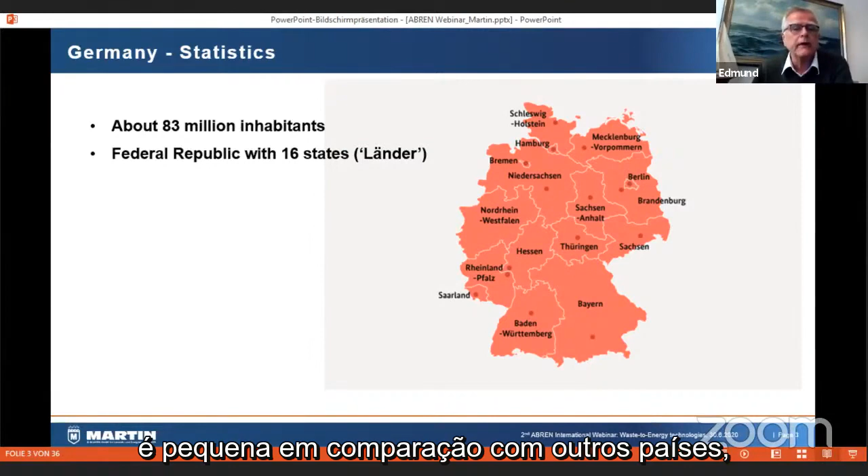Germany has about 83 million inhabitants. It's a little bit over 350,000 square kilometers, so quite small compared to many other countries, especially to Brazil. We are a federal republic, 16 states, where some of these states are cities like Hamburg, Bremen, and our capital city, Berlin.

So when it comes to waste arisings in Germany in 2018, which are the last figures available, the total waste is about 420 million tons, of which a majority was recovered, and quite a bit of that was recovered thermally, which means in some kind of incineration plant.

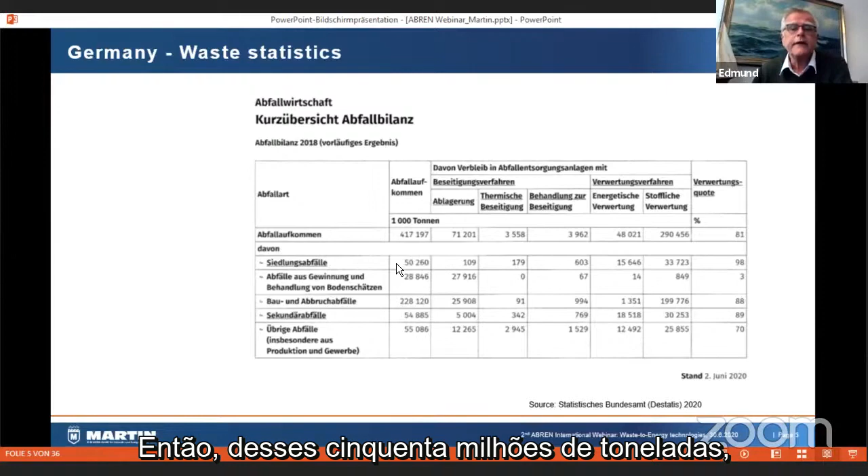When you look at the details for 2018, of these 420 million tons, what is of interest to our discussion today is basically what is called Siedlungsabfälle, which is municipal waste or similar waste, about 50 million tons total. The majority, like in many countries, is obviously construction and demolition waste, which is more than half. So of these 50 million tons, 33 million tons were material recovered and about 15 million energy recovered, which is basically waste to energy, which we will talk about.

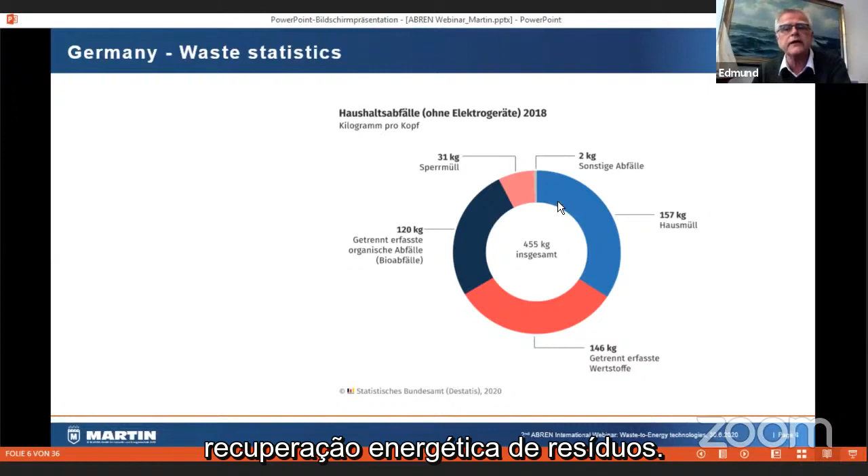Per capita, you see what every German generated in terms of waste in 2018, 455 kilograms, which does not include electronic waste. And you can see here the different big fractions. This is biological waste, about 120 kilograms. This is material for recovery. This, almost 160, is MSW. The majority of that is obviously going to waste to energy. And there's a little bit of bulky waste and some other waste streams. So per capita, we have about 450 kilograms per capita per year in Germany in 2018. Quite a bit of waste that we are still generating.

Regulations. This is not true for Germany alone, but for all of the EU member states. All regulations come from Brussels. That's a very straight and very clear rule. Regulations are drafted in Brussels, they are passed eventually, and then they have to be put into national law in every EU member state. Typically, there's a 4 or 5 year time frame for each of these regulations to be put into national law. The only drawback is that there are no really good sanctions if countries don't do that.

Some member states are a little bit more active doing that, some are not, so there's not a lot of good sanctions. Germany is playing a very active role in Brussels in the legislation, especially in waste management, and many of the rules or the data taken, the limits, etc., are taken from German experience.

I've been very active in Brussels myself as president of ESWET, the European Association of Waste to Energy Technology Suppliers. There you see a lot of German people from the government that are very active in supporting new regulations.

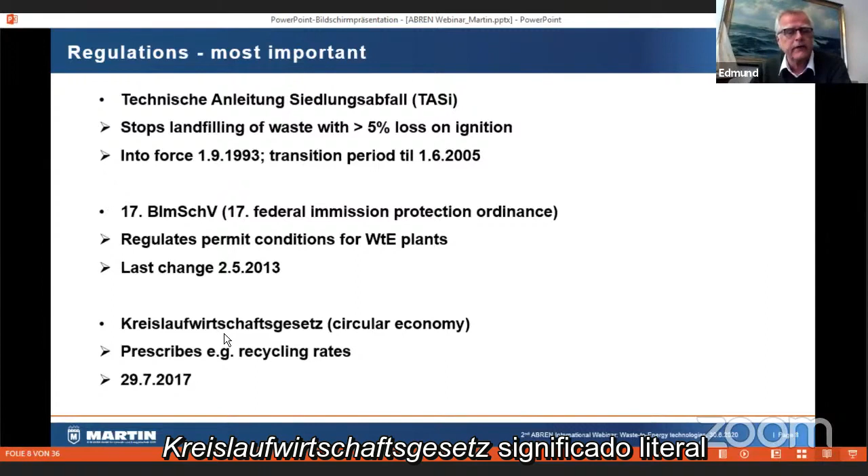This is one really very much to remember. What is important, and I think this is not only in Europe but worldwide now, is circular economy. In Germany, we call it Kreislaufwirtschaft, which literally means circular economy, which clearly says we have to go away from the habit we had for many decades of using products only once, but try to keep them in the economy as long as simply possible and feasible.

This law describes a lot of things, but among others, recycling rates for packaging waste, for municipal solid waste, etc. This came into force in 2017. Again, it's basically a law coming down from the Circular Economy Directive passed by the EU some years ago, and then being trickled down into German law.

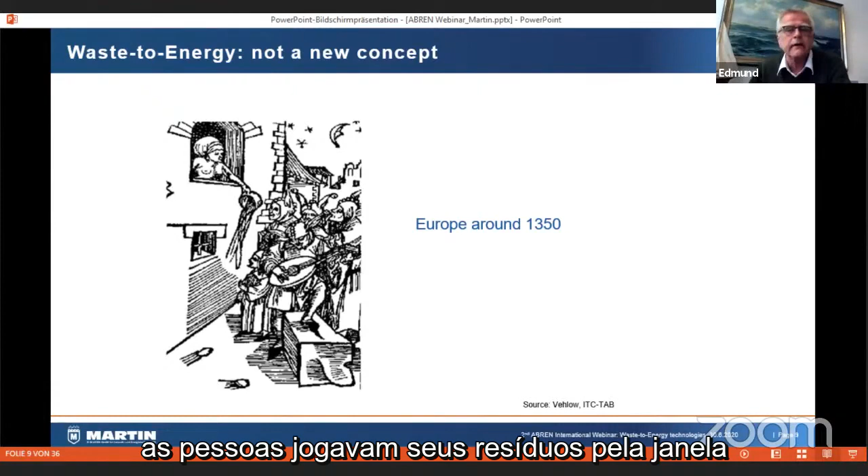Waste to energy is not very new. In the Middle Ages, in Europe at least, people threw their waste out of the window. So you had very dirty streets, hygiene was very bad, and this caused a lot of headache and a lot of diseases.

The first waste incineration plants, I wouldn't always call them waste to energy, but incineration plants, were built in the late 19th century, around the 1870s in England, and in Hamburg, Germany, at the end of the 19th century. These were very simple plants, but already they had some electricity generation, some district heating use, and they even used the bottom ash to bake bricks. So a lot of the concepts we have today were already put into force then: making use of the energy in the residual waste that can no longer be recycled, and also using the materials left after incineration. It's a concept very important today, but nothing our generation has invented; it was already in place in the late 19th century.

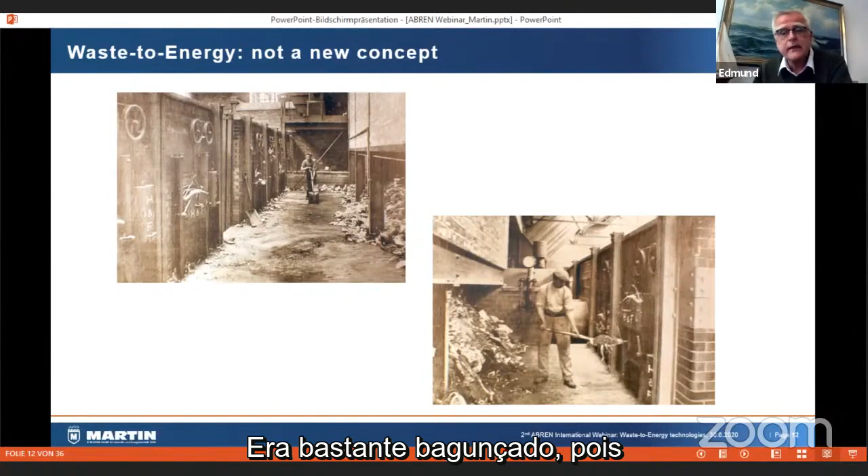There are some pictures of plants from around the turn of the 19th to 20th century, which were quite messy because they were sometimes batch type. People had to feed the waste by hand and take out the residues afterwards by hand. Later on you had a carriage where you took out the bottom ash. It was all very simple, but it was a concept that was working. There were a few plants in England, Germany, and Denmark, but it didn't really last.

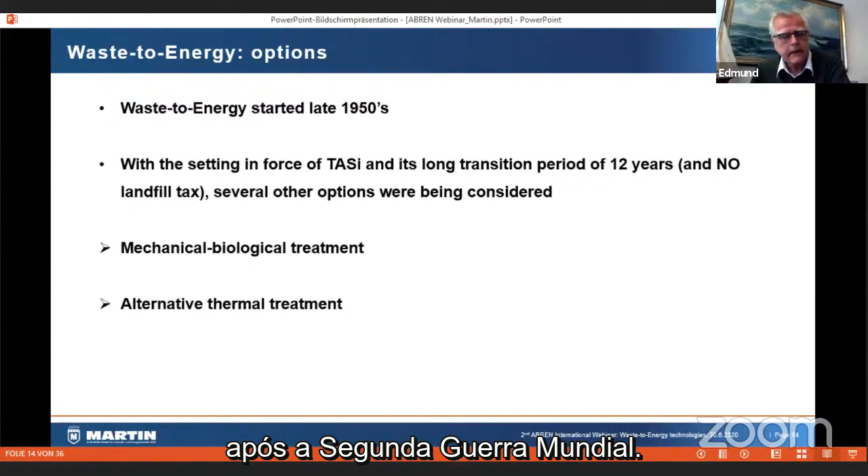Waste to energy really only started in Germany, but also across Europe, after the Second World War, where the economy was good enough that there was enough money available. Landfill was considered not the best option, so there was also a drive to make use of waste and materials as much as possible. This is where it basically started in Europe and in Germany, in the late 1950s.

As I said before, with the setting in force of the technical ordinance for waste in 1993, there was a very long transition period of 12 years with no landfill tax, so nothing happened in between. There were many other options being considered because, as is still the case today, waste incineration was not looked at favorably by many people. So mechanical biological treatment plants were developed in Germany especially, and there was a lot of discussion on alternative thermal treatment processes, which I will talk about.

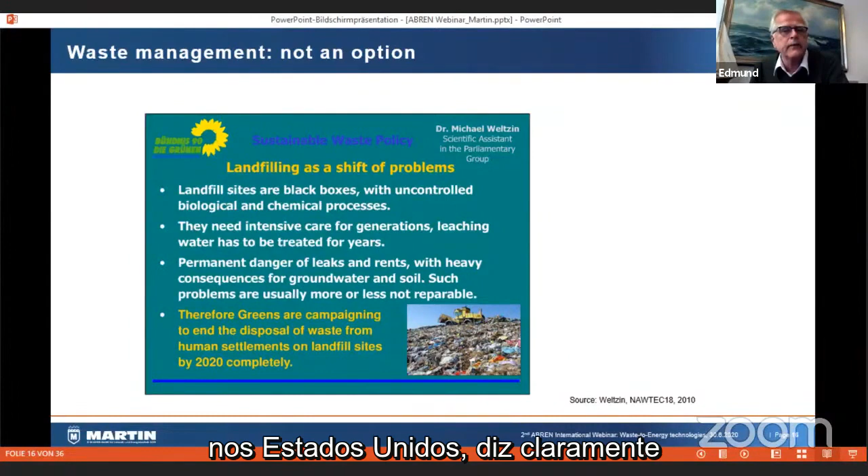Even the green people that don't like incineration, in 2010 published a report in NAWTEC in the United States where they clearly call for an end of disposal of waste from human activity on landfill sites. This is what they said for 2020. I think we more or less got there in Germany, that waste which still contains biologically active material is no longer being dumped on landfills.

So, mechanical biological treatment. As I said before, landfilling of biodegradables stopped in mid-2005. At this time we had a green social democrat government, and they don't like waste incineration, so there were developments of mechanical biological pretreatment plants. Some plants worked, some plants failed. There are still quite a few in operation today.

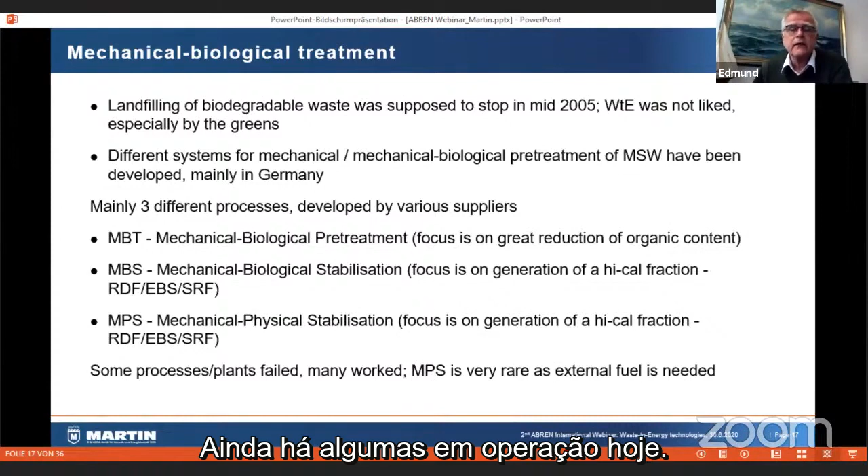The mass balance is basically: you can recover some metals, which is good. You have some loss from evaporation because you need heat to drive off the water. There is still, and this was a change allowed by the law, the option to landfill the low calorific fraction. And then there was something considered in the early days to be valuable - a high calorific fraction - because driving off the water increases the heating value. This was supposed to go to coal-fired power plants and cement kilns.

In the early days, when these plants were developed and business plans were made, it was even thought they would get a positive fee, getting paid for the high calorific fraction. We have about 50 plants in operation, with 6 to 7 million tons of MSW going in there, and the remainder is about 50%, as I said before, remaining after this treatment. What you have to remember, though, is that the total heat energy content is almost unchanged - there's some rotting, some carbon chemical reaction, so you generate heat and drive off water, but the energy content stays more or less the same.

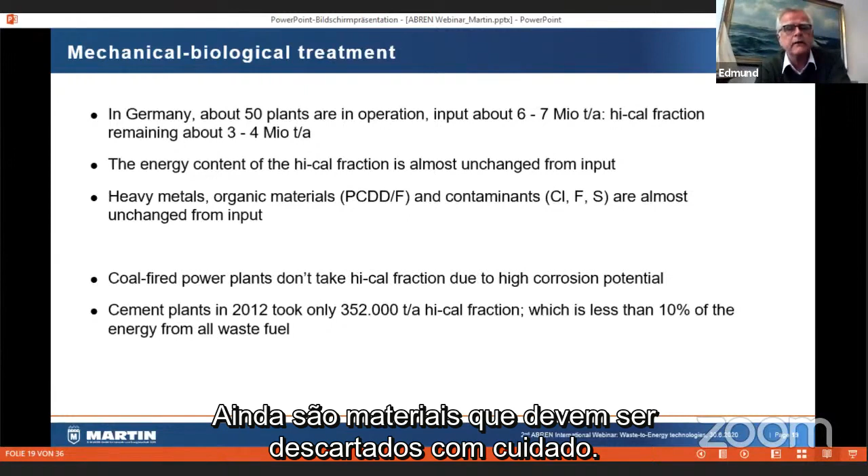Especially the material that makes non-recyclable waste difficult - organic materials, contaminants like chlorine, fluoride - are still in there, so they still have to be handled very carefully. In the end, coal-fired power plants did not like this because they were very afraid of corrosion in their boilers, and cement plants only take a very small fraction. These figures are from 2012, but they have not changed dramatically over the years.

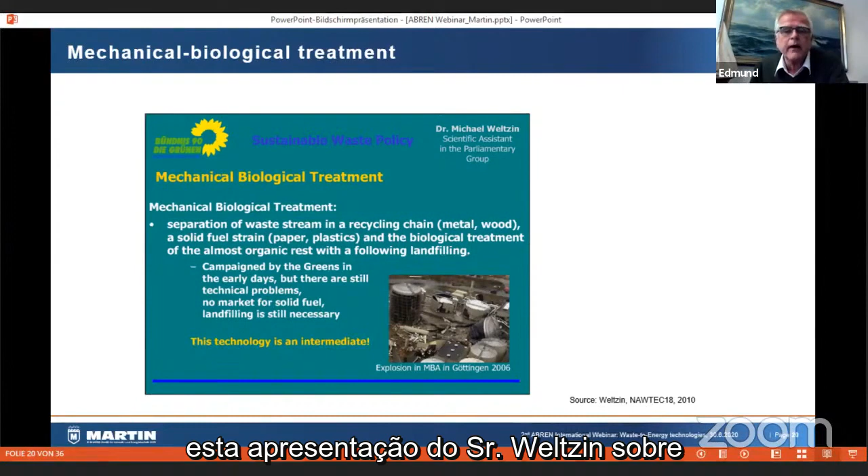They are not called waste-to-energy plants, they are called RDF or solid recovered fuel plants, but in essence they are the same technology and the same type of material as waste-to-energy plants. And again, I like to cite this presentation by Mr. Weltzin about mechanical biological treatment.

I only want to draw attention to the conclusion at the bottom: this technology is an intermediate. And what we've seen in Germany in reality is that because of the economy, they cannot sell the high calorific fraction, but have to basically pay a fee for that. A lot of the plants have been shut down, or once they reach the end of life, they will not be replaced, they will just be torn down.

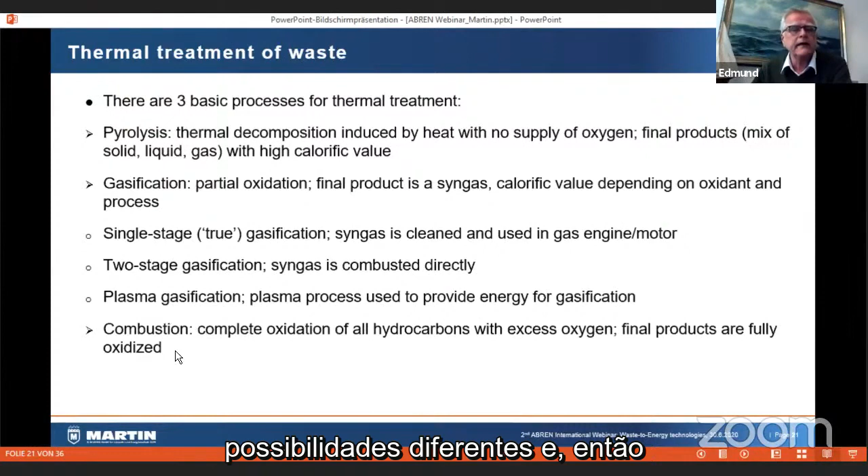Thermal treatment of waste has 3 basic processes. It starts with pyrolysis, goes to gasification - there are different possibilities - and then combustion. It starts with pyrolysis, where there's no air injected, so no oxidation happens. In gasification, there's incomplete oxidation, creating a combustible gas you might use in a different process. Then there's straight incineration or combustion, where you completely oxidize all the burnable material.

There was a lot of discussion and hope for so-called alternative thermal treatment plants - as I said, pyrolysis. This is based on a study these figures from ISWA did some years ago. I was part of this working group where we looked at these different technologies. There's about 25 plants worldwide based on pyrolysis of mixed municipal solid waste, non-recyclable waste. The capacity is very small, about 1 million tons, mostly in Japan.

Gasification - again, it's single stage, meaning there are plants having a gasification stage integrated with a combustion stage, which doesn't really have a big advantage compared to incineration. There are around 50 plants, again small capacity. 2-stage gasification creates a syngas, a combustible gas which can be used for something else. There are even fewer plants with very small capacity. And plasma gasification, just one means to gasify the material - there are even fewer plants.

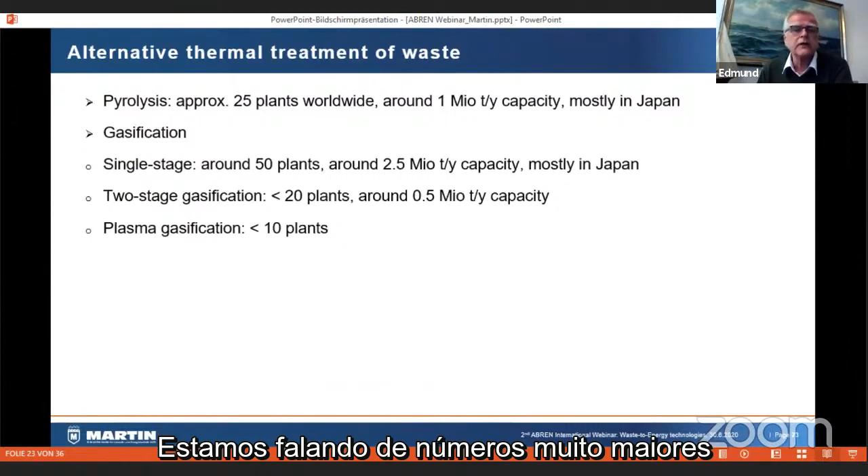When you compare this to MSW, there are more than 2,000 plants in the world with more than 100 million tons per year capacity. So we're talking about much larger numbers, much larger experience and proven track record. Mr. Weltzin says these technologies have not shown reliability so far - this was in 2010, and I don't think this has changed at all up till now. There have even been more plants losing money, people trying to get this working, but it doesn't work for mixed municipal solid waste.

Now, a short intermediate about Martin company. We are a small company based in Germany. This is our head office where I'm sitting right now, in Munich. We are almost 100 years old, family owned - first generation the founder, second generation, third, and the current fourth generation. 100% family owned, we are definitely one of the main companies in the waste energy sector since 1925.

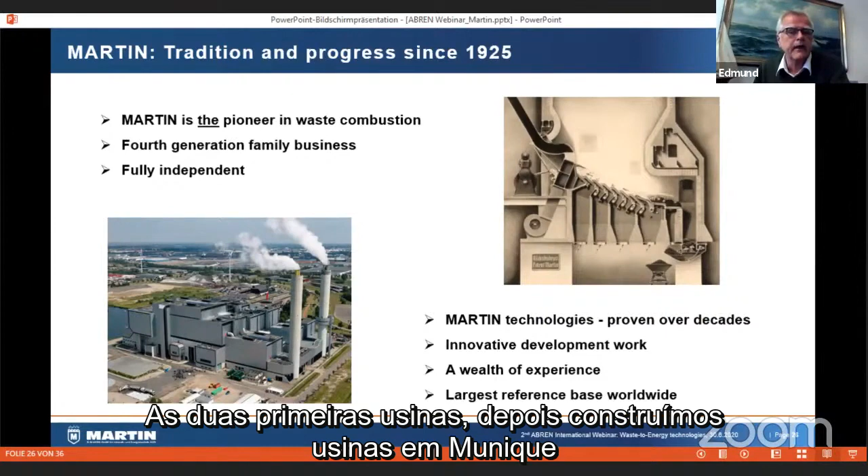This is a picture from the patent application in 1925. And this is one of the largest plants in the world, in Amsterdam, with 6 lines. So we have a lot of experience and a large reference base, and it might be interesting to know that the first 2 plants on our reference list were built in Sao Paulo. They are no longer in operation today, but this was in the late 50s, the first 2 plants. Then we built plants in Munich and more in Europe.

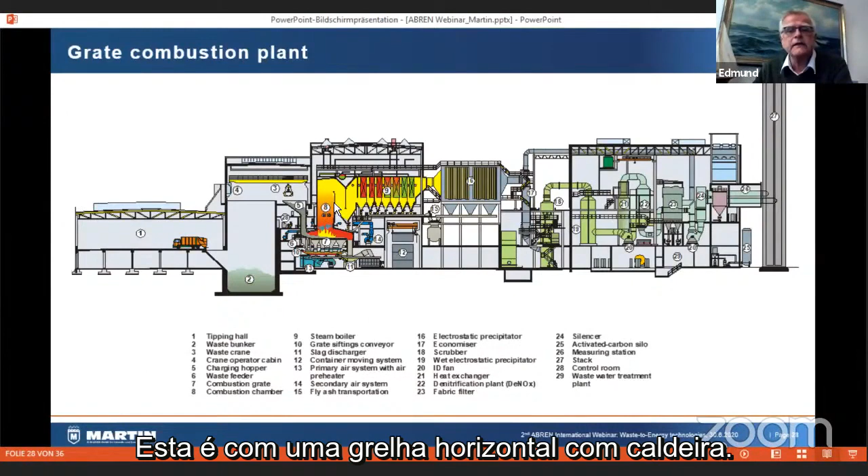A total plant can then look like this. This is a horizontal grate in this case, with a boiler, and then the very elaborate flue gas treatment to meet emission limits that are very stringent and tight, not only in Europe but in most countries where these plants are being built. They want European standard emission limits, which are quite low compared to many other industries.

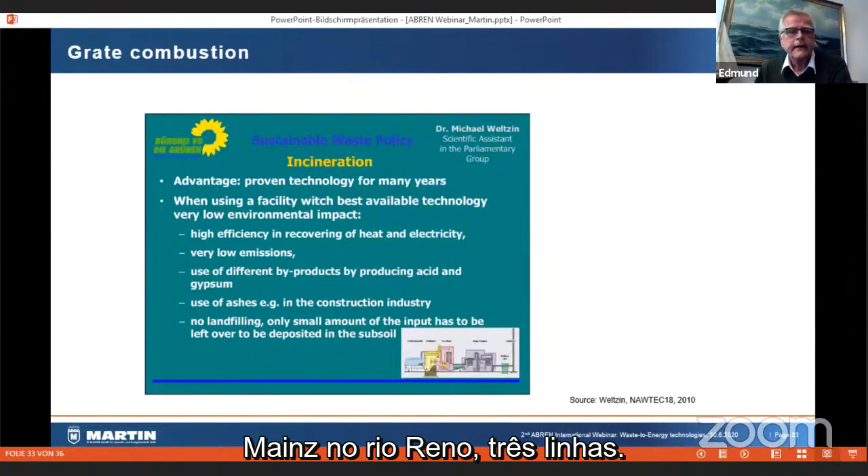And again, Mr. Weltzin citing that it is a proven technology for many years. I mean, this was something amazing for a green person to say, and he's a scientific assistant in the parliamentary group in the Bundestag, in the federal parliament, to say when using best available technology, there's very low environmental impact. So I think it's something that speaks almost for itself.

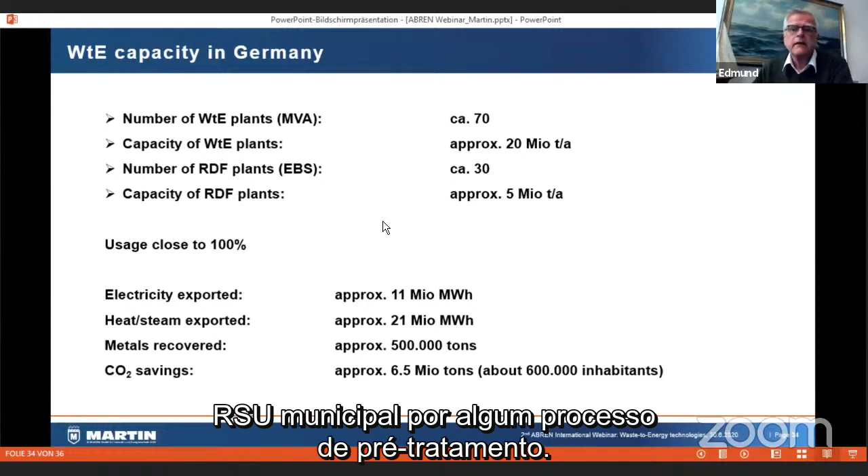What is the waste capacity in Germany that we have right now? We have about 70 plants that are straight waste to energy plants, capacity about 20 million tons. And then we have about 30 plants built basically to take high calorific fraction. It's called Ersatzbrennstoff, RDF, solid recovered fuel, some high calorific material developed from MSW by some pre-treatment process. The capacity of that is about 5 million tons per year. And in the last years, the usage was basically 100%.

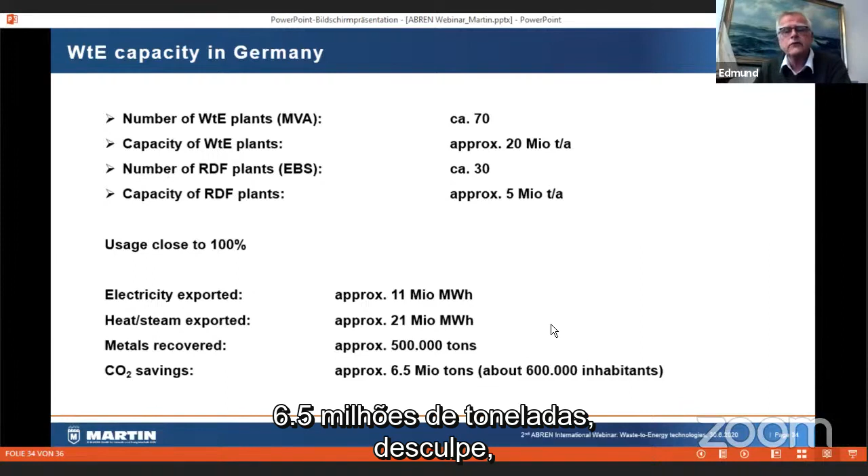At the moment, we are burning in Germany year after year about 25 million tons of non-recyclable municipal solid waste or waste from commercial industry. We export a lot of energy. We recover close to 500,000 tons of metals, ferrous and non-ferrous, and there's quite a substantial amount of savings of CO2. The 6.5 million tons is about the CO2 emitted by 600,000 people.

It's clear we cannot solve the energy problem in any country. There are projections that if you have a good energy recovery rate, you can maybe have 3 or 4% of the electricity need covered, no more than that, but we can make a very valuable contribution and especially avoid landfilling. So what are the conclusions?

Waste to energy plants are definitely an integral part of German waste management. There is a lot of opposition, that has not changed at all. Working close with the public is obviously very essential, to inform them as early and as openly as possible. The market in Germany is mainly replacement. There's almost no greenfield projects. There's also no capacity increase, but mainly to replace lines that have now become 30, 40 years old, which is a typical lifetime of a waste to energy plant.

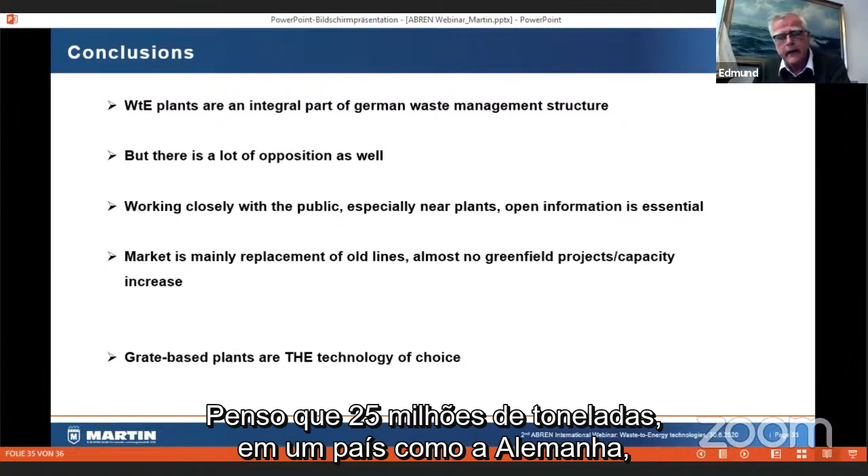And for the technology, grate-based plants are the technology of choice because they are proven, they're reliable, and they are there to make use of the energy and the materials in waste that cannot be recycled in a sensible way. And I think 25 million tons in a country like Germany speaks for itself. There are very clear statistics that say we only take away from landfill, we don't take away from recycling. We want to really use the waste that is not recyclable anymore, that is at the end of its lifetime, and avoid landfill. And with that, I thank you very much for your attention.

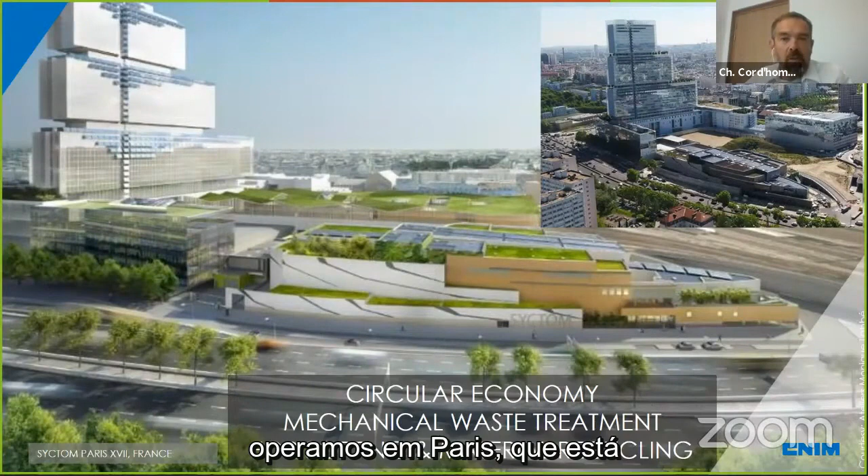And for waste, we are also building mechanical and biological waste recovery with sorting and composting, or sorting and material recycling, just as this brand new plant that we have built and that we are operating in Paris, in which we are sorting almost completely automatically material from the selective collection from Paris. It's 45,000 tons per year of waste. In total, all the plants that we have built are recovering the material and energy from municipal solid waste of 110 million people around the world.

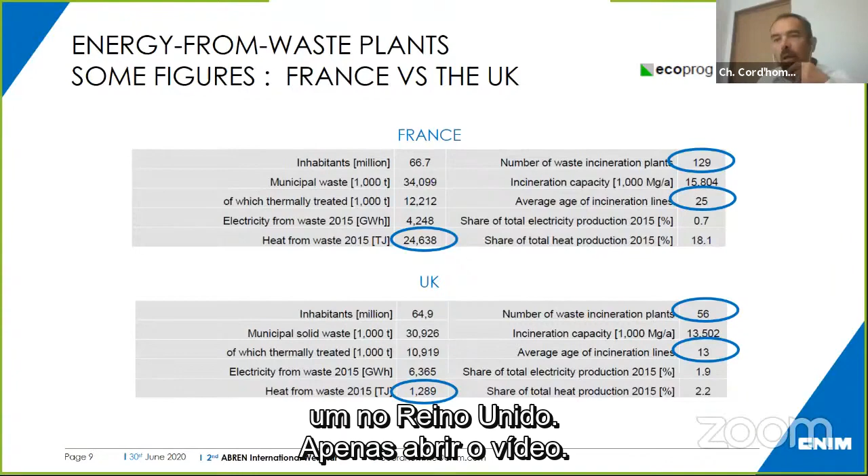So just a moment. It seems... Excuse me, a video just started. Okay. So it's better.

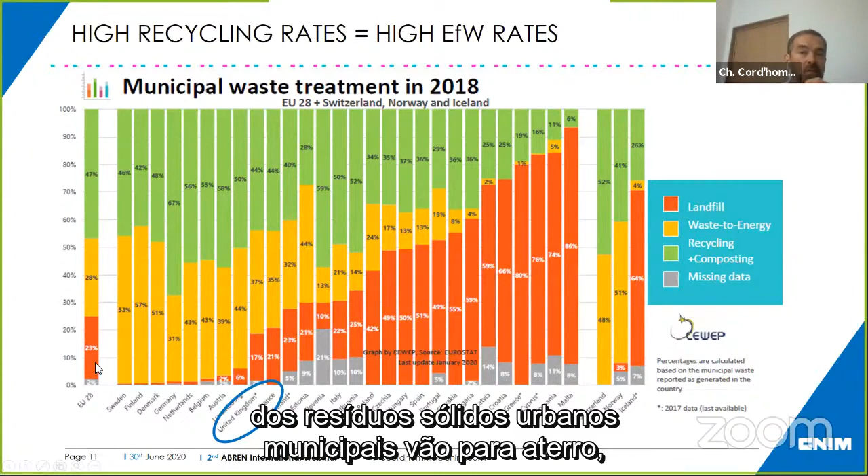This graph is very interesting from CEWEP, once again coming from official statistics from Europe, Eurostat, comparing the shares between landfilling in red by country, then in orange waste to energy, and in green recycling and composting. You can see on average in Europe that we have 23% of municipal waste going to landfill, 28 going to waste to energy plants, and 47 for recycling and composting. This is the average for the European Union.

In the United Kingdom and France, this is quite similar. There is 17 to 19% going to landfill compared to 21 in France, and 35% going to waste to energy in both countries. But in Germany, as Edmund has shown us, 31 is going to, almost nothing is going to landfill, as is the case in Sweden, in Denmark, or in Belgium. On the contrary, on the other side, you could see Eastern Europe countries, like Greece, for example, where 80% of the waste is still going to landfill.

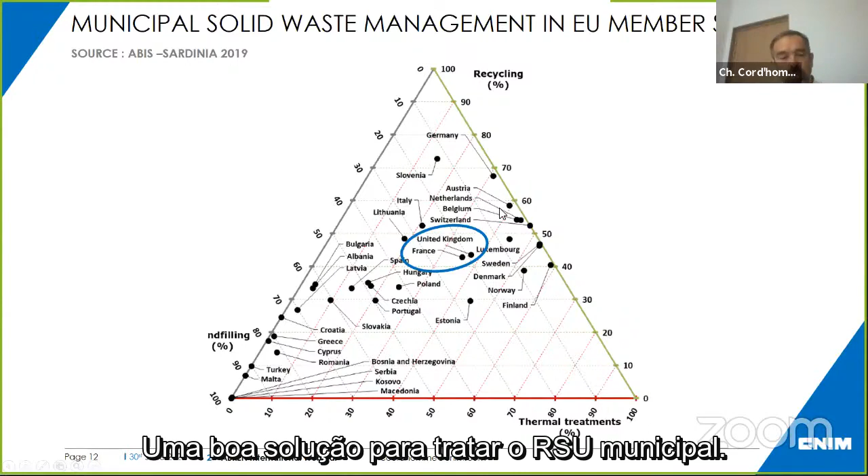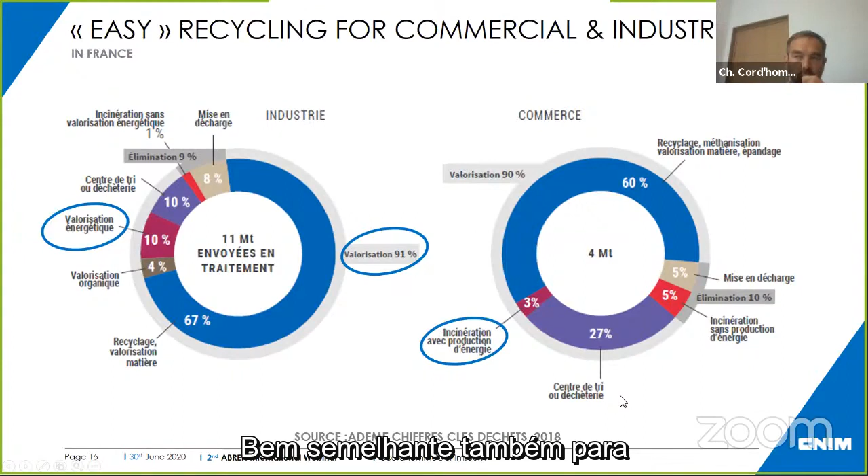It's quite easy to recycle such waste, and it's rather similar for commercial waste. It's rather easy to recover the material in this type of waste because it's more homogeneous and less polluted in general. So it's easier for the industries to recycle the material inside.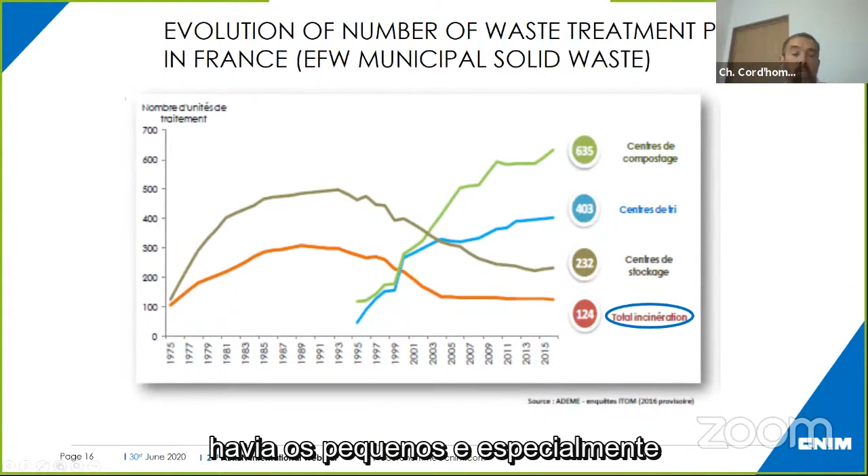So after very strict regulations coming from Europe and applied in France, most of these plants have been closed to install flue gas treatment, and they have been replaced by much larger facilities. It's the same for landfill. The small ones, and especially the uncontrolled ones, have been closed to change for sanitary landfill. And we could see there, of course, an increase of sorting facilities and composting facilities at the same time. But this number of facilities is not the most important point. The most important one is the capacities.

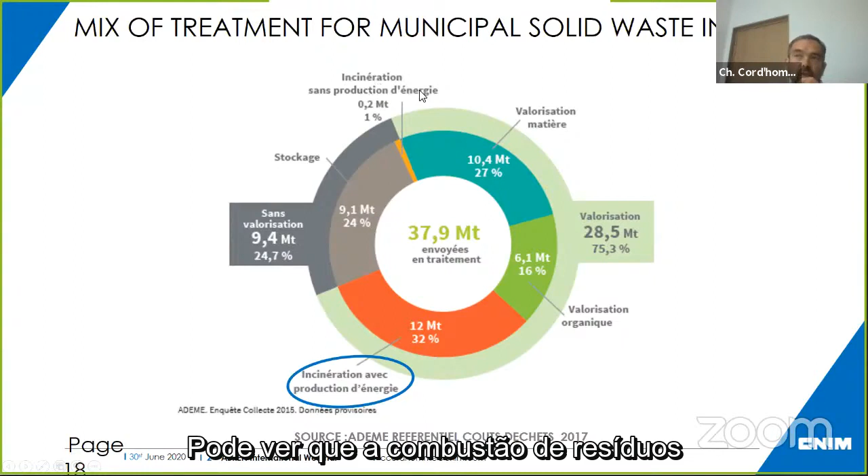So this is municipal solid waste: 38 million tons are going to treatment, 32% are going to waste to energy facilities, 16% to organic recovery, and 10 million tons to material recovery. So in total, we have 75% recovery with these three types of treatment. Still, in France, we have 9 million tons, 24%, without any recovery going to landfill. You could see that waste combustion without any energy recovery is only 0.2 million. So it has been reduced to almost zero. But still we have landfilling in France.

With material recycling, it has a very interesting impact, because 66% of the paper which is used in this industry is coming from recycling. 50% of the steel is coming from metal recycling. 58% of the glass is coming from recycling.

The only product where it's difficult to recycle is plastics. Only 6% is recycled in the plastic industry. And the plastic which is the easiest to recycle is plastic bottles. Plastic films and things like that are extremely difficult to recycle.

At the end, in France, when we compare the shares between energy from waste, recycling, and landfilling, you could see that landfilling has decreased, but slowly. It was 13 million tons, and now it's 8 million tons. You could see an increase, but very small, of energy from waste, and an increase of composting and material recycling.

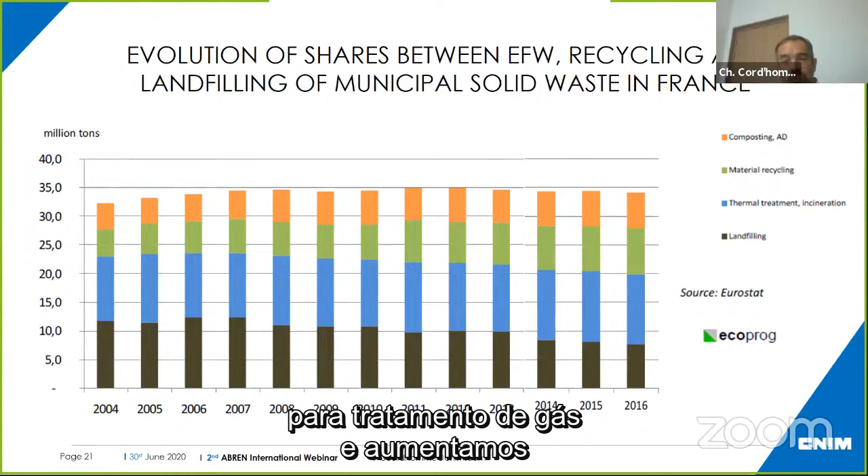It's more or less flat because initially we had a lot of facilities in France, and we have improved the working, revamped them for flue gas treatment, and increased the sizes to obtain this result. The point is, because of that, a lot of facilities, you see 100 facilities, have an age higher than 25 years. Even 1/3 of the waste treated in France is treated in waste-to-energy plants older than 35 years.

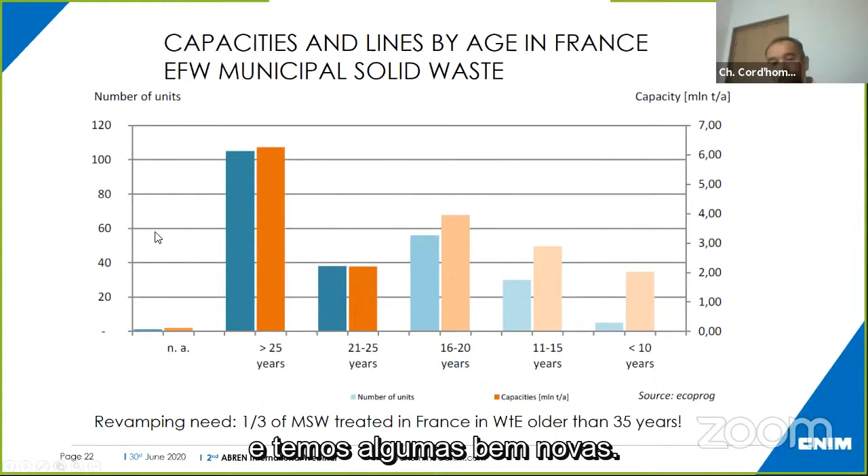So this age needs revamping of some of the plants, and we have quite a few plants which are brand new. Some examples of revamping that we have done in France. This is a plant close to Versailles, in the Paris region. This plant was initially built 45 years ago, with 2 lines. We have then built boilers.

We have built a 3rd line, installed flue gas treatment. And in fact, the two old lines, 45 years old, have just been replaced by line 4 of 12 tons. So the total capacity of the plant has not been changed, but we have changed the energy efficiency, the energy recovery with a brand new turbine, and completely replaced the flue gas treatment. It was a wet system; we have changed it for a dry system with NOx treatment.

Another example of revamping is Rambervillers. It's in the east part of France. We have called this plant Phoenix. We are working for Suez on this plant, supplying the chute-to-stack, a new line of 10 tons per hour and new flue gas treatment. So you see the operation.

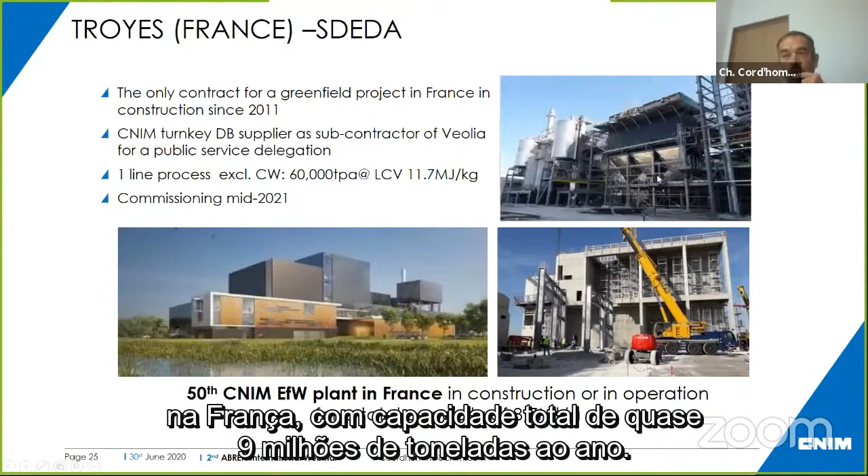And you see it's a small plant, very small plant, 60,000 tons per year. So it's technically possible. It's quite expensive to build such small plants. It's much less expensive as a gate fee to build much bigger plants. But in this area, it was a good solution nevertheless. In France, it's the 50th plant that we are building, for a total capacity of almost 9 million tons per year.

A last example of a new plant in France. This is on the overseas island of La Réunion, close to Madagascar. We have obtained this contract to build a plant which will burn RDF, prepared on site, 140,000 tons, more or less, of CSR, which is the French word for RDF. And this RDF will be prepared on site and then go to the waste-to-energy facility to produce power.

So let's compare to the UK. In fact, in 2004, the situation in the UK was completely different from France. 70% of the waste was going to landfill. It was a landfill country. And if we compare to today, it was very similar to Romania. In Romania, you have 70% of the waste going to landfill. So you see, less than 2 decades ago, the situation in the UK was completely different from France.

To catch up with France, they had a lot of work to do to reduce this landfill. Why they have so many landfills is that they have a lot of clay quarries for bricks, and at the end of the life of the quarries, it's a very nice landfill site. So it was very easy and inexpensive to use these old quarries. So how did they manage to close the landfills in the UK?

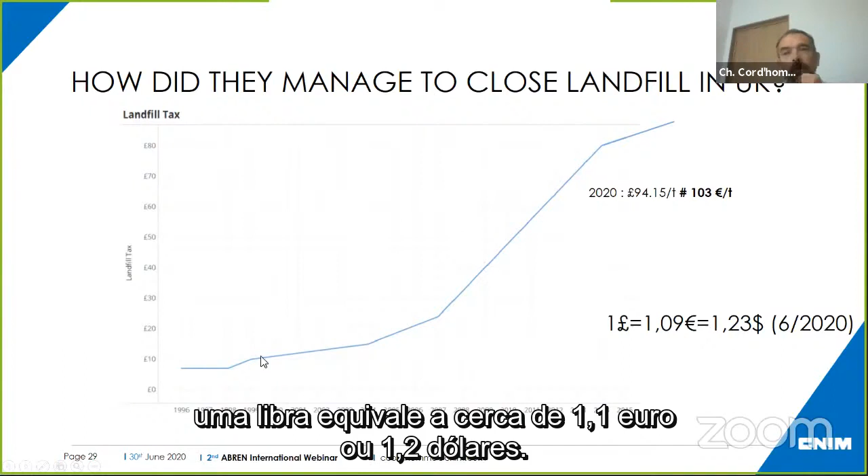They have put in place, so it's a different way from Germany where there has been a ban, but in UK they have decided to put in place a landfill tax. Initially it was quite flat. It was around £10 per ton. So £1 is about 1.1 euro, $1.2. It was quite flat and it was not moving very fast.

We have built the first modern energy from waste plant in UK in '94, but this regime of landfill was not very incentivizing the market. Then they have decided in 2004 to increase this landfill tax of £8 per ton every year during 10 years, and so to have £80 per ton in 2014, and now it's with escalation. So in 2020, the landfill tax is £94 per ton, so more than 100 euros per ton.

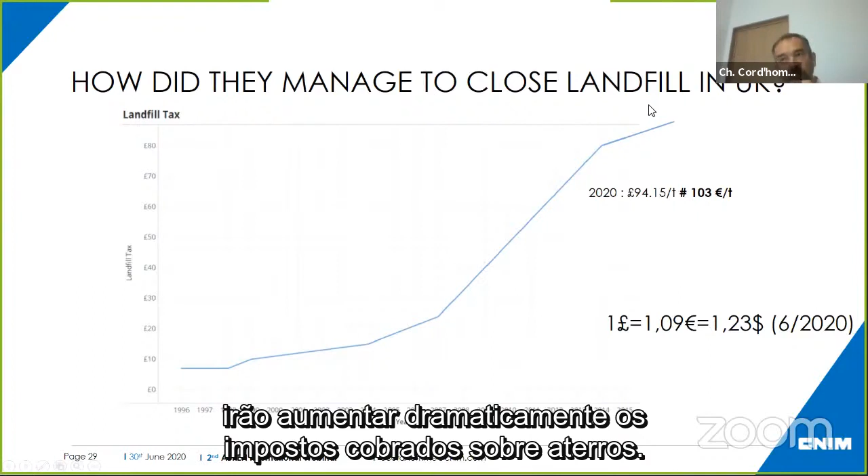And in the law, it's written that it will not decrease. And as they have put in the law directly in 2004 that they will increase this landfill tax with this slope, it has given a very good visibility of the market. The private companies in UK were able to know that 10 years away, landfill will not be any more competitive because of this landfill tax. And they know that it will not change because it was with escalation afterwards.

And with this visibility, it was possible to go to private financing and to build facilities to be more competitive than landfill with this landfill tax. So in fact, the first solution, an easy solution, was to ask your neighbor.

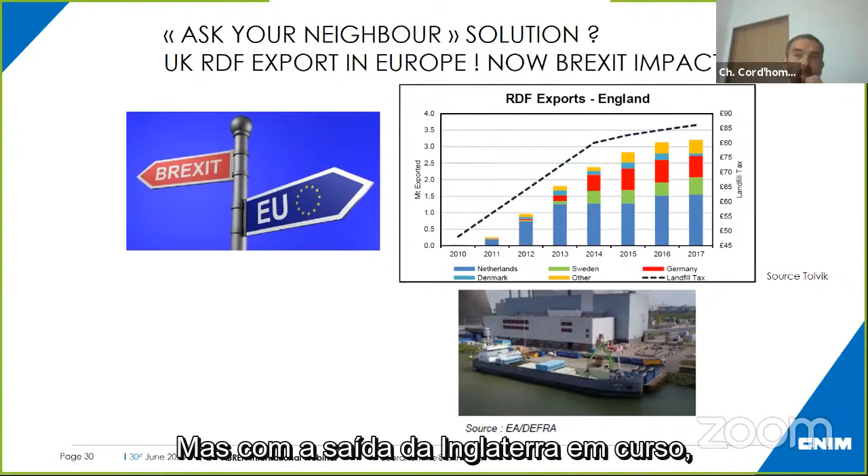It was an easy solution because there was a need of waste, especially, for example, in Sweden and Denmark, to produce heat. And it was cheap at this time because the sterling was very high in value, 1.5 euros per pound. But with Brexit, it has been going down to 1.1. Therefore, it's not a good solution, not so inexpensive. So they have to build facilities now. And this is the solution, to build facilities in UK.

And during more than a decade, you could see the construction of energy from waste plants awarded by countries in Europe. In the period 2010-2019, UK has been by far the first market for the construction of energy from waste. 44% of all energy from waste plants built in Europe has been built in UK. Sweden is number 2, but much smaller, and France is number 7 with 4% of the capacity awarded. So a very, very active market because of this regulation.

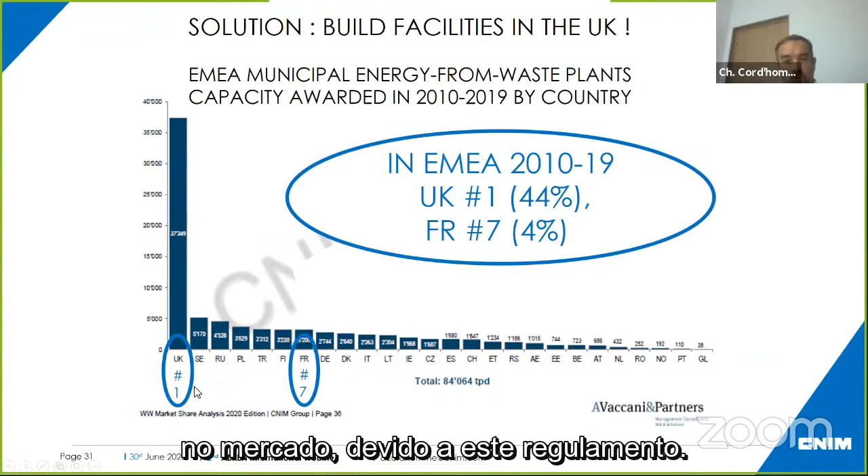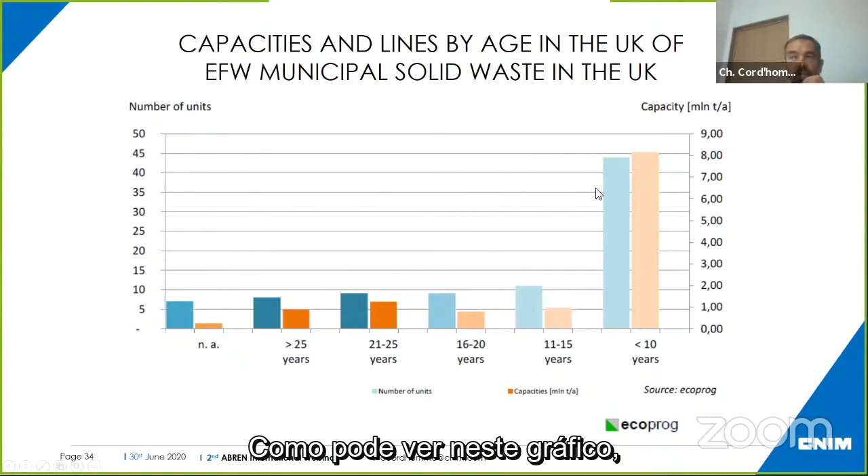Another presentation of this result, you could see there the landfill, which has been reduced by 75% in 15 years, and the mix between material recycling and energy from waste to replace landfilling. Of course, this means that most of the plants in UK are less than 10 years old. As you see on this graph, 8 million tons are less than 10 years old because this is a brand new park that has been built.

Some examples of plants that we have built there in the British Isles. The first one I have told you was SELCHP in London, which is 1 mile away from the Tower of London, built in '94. It was a merchant plant that we have built together with Veolia. And then a series of plants that we have built in the 90s and beginning of the 2000s.

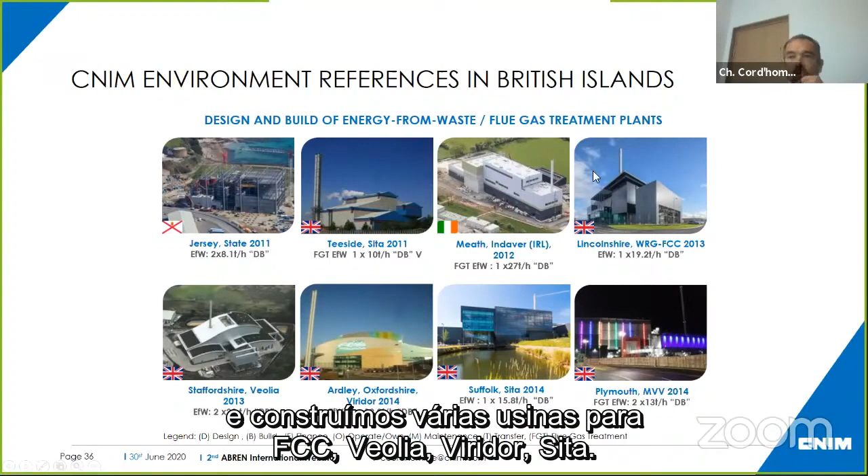And then there was a new regulation for landfilling beginning of 2010, and a new period of construction of new plants. We have built a number of plants for FCC, Veolia, Viridor, Sita, MVV, and so on. And now Wheelabrator, which is a new client for us.

And the last four ones that we are finishing to build: Parc Adfer for Wheelabrator, Avonmouth for Viridor, Earlsgate that we are starting for Covanta Brockwell, which we will also operate, and Lostock for the joint venture between CIP and FCC.

In total, this is 24 turnkey energy from waste facilities that we have built in the British Isles, with a total capacity of 7 million tons, so 37% market share. One difference between France and UK is that most of the plants are under private concessions.

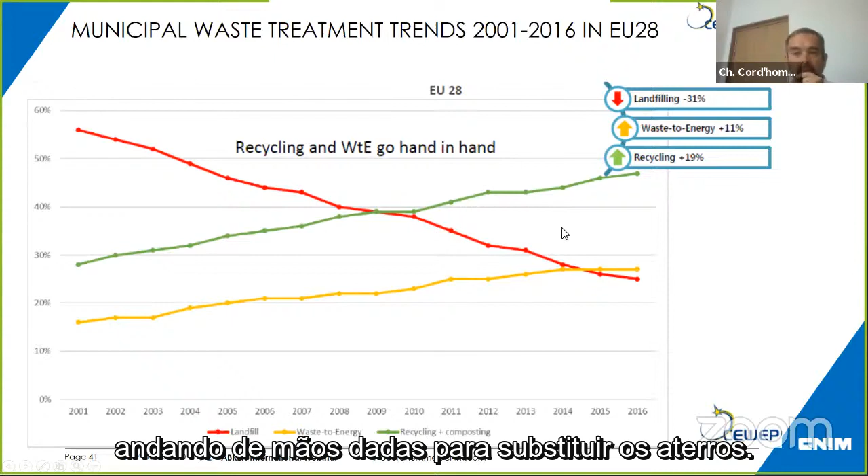I remind you of the objective that Edmund has told you initially. There is an objective of reducing landfilling down to less than 10% in 2035 in Europe, and having recycling up to 65%. So we have to continue this road.

I won't go too much in details with the technology that Edmund has presented. So this is, for example, the plant in Oxford. You could see the flue gas treatment is very different from the one that Edmund presented, because it's a dry system with lime, and a DeNOx which is done non-catalytically in the furnace. But the principle is rather similar.

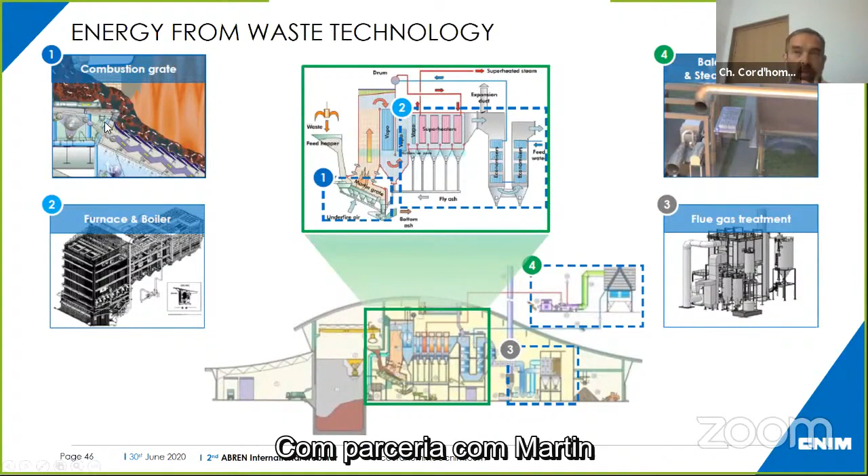So in this type of plant, we have a combustion system - we are in partnership with Martin since 1961. And then after the combustion system, we have the furnace and boilers producing steam, then the steam power cycle, and the flue gas treatment.

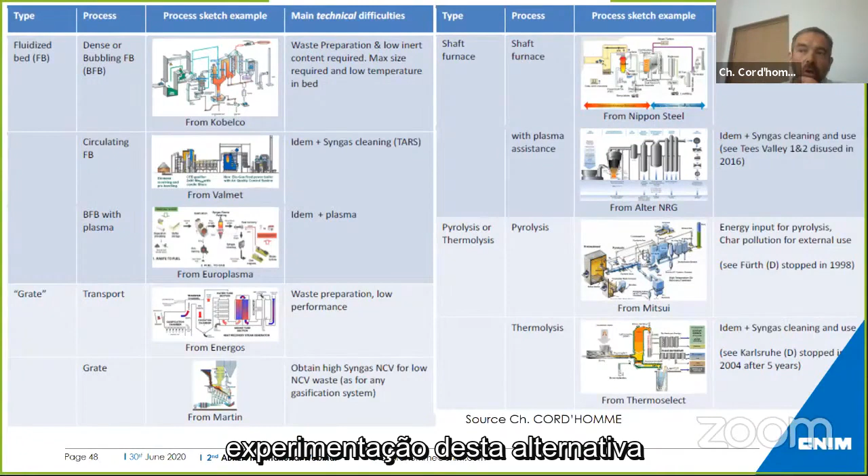I will say a few words about alternative thermal treatment, because there was a promotion and experimentation of this alternative thermal treatment in UK with subsidies to promote this type of technology, especially gasification. If you could produce syngas with a good level of calorific value, you can obtain subsidies.

You can have gasification on a grate. We have done, together with Martin, some experiments. On a grate, if you stop secondary air, you have incomplete combustion and you have gasification, and you could have a syngas there. So it's a gasification, but it's also a grate combustion.

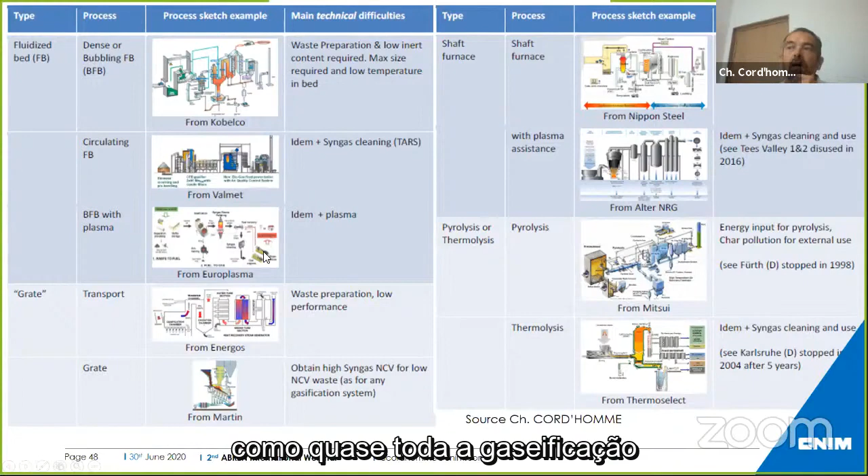Like almost all the gasification technologies promoted by the market, especially in Japan - some are based on fluidized bed, some on shaft furnace, and at the end you have thermolysis or pyrolysis if you reduce the air injection completely. You could have plasma assistance in fluidized bed or in shaft furnace. But at the end, all these technologies, a very important difference from grate combustion, is that they need preparation of the waste, which is always very difficult with residual mixed solid waste.

So at the end, the technologies which are used for residual municipal solid waste - you could see here the figures for the number of plants in commercial operation over 5 tons per hour on all the continents. So you see grate is more than 90%.

A few fluidized bed, which needs preparation, especially shredding, especially in China, or with RDF. A few gasification, mainly in Japan, and pyrolysis, and very few plasma.

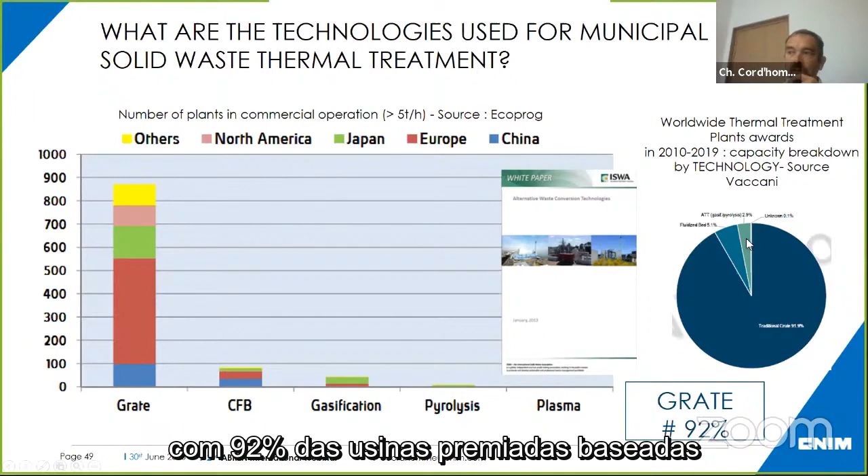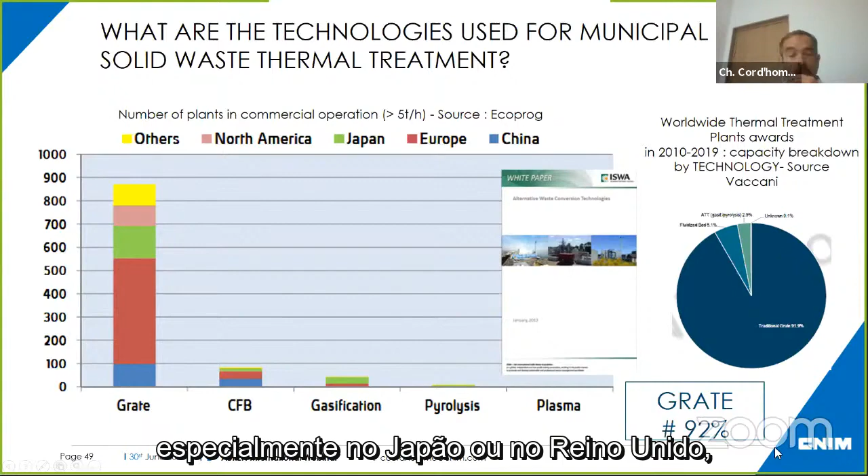In the last decade, 92% of plant awards were based on traditional grate technology, 5% fluidized bed, and 3% gasification or plasma gasification, especially in Japan or UK. In Japan, more than 90% of the plants are based on the grate system.

The European Union, through its Science and Knowledge Service, JRC, has published a paper on waste energy technical potential. They state that gasification has not been commercially proven to date, even with extensive pretreatment of the waste for better homogeneity. Importantly, residual municipal waste is not homogeneous, it's variable, and there have been mainly costly failures of gasification and pyrolysis in Europe. There are a few plants working in Japan, but Japanese waste is very different, and even the few that work don't have higher efficiency in energy recovery.

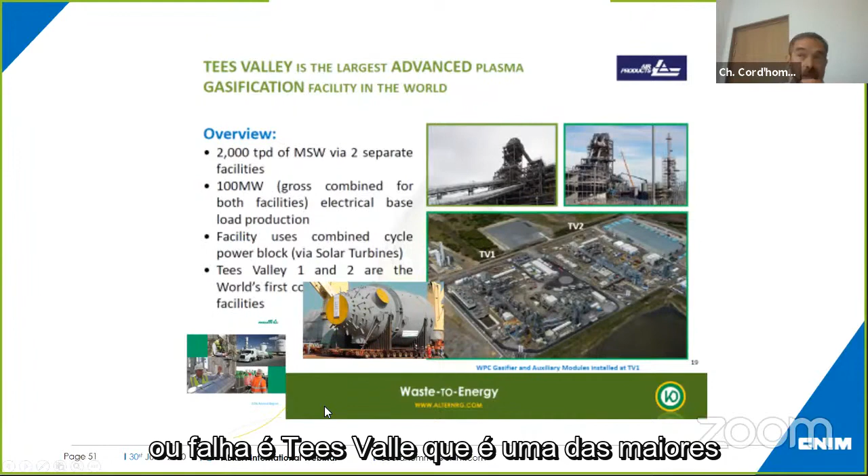A very interesting example of failure in UK is Tees Valley, one of the largest plasma gasification plants. This slide came from the supplier, Alter NRG. You can see the gasifier with plasma. It was built by this company for Air Products, a huge facility of two times 300,000 tons. You see two plants there.

But in late 2016, the newspapers were saying it was the final nail in the coffin for the Air Products site. Air Products quit the energy from waste market and lost almost $1 billion on this plant alone. It was a huge technical disaster, absolutely not working, and they lost this amount of money only 6 months after startup.

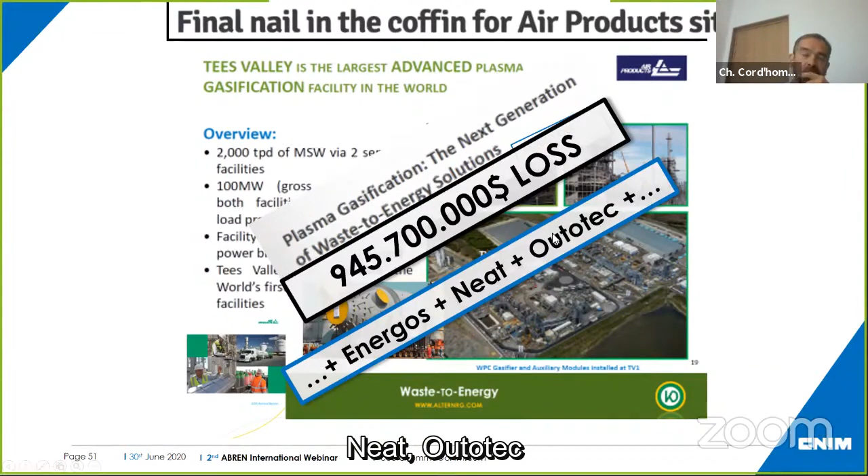And it's not the only failure in UK with gasification. Energos built 4 plants using a grate transport system with gasification, and they failed. NEAT with pyrolysis, or Outotec with fluidized bed, also failed. They stopped promoting gasification in UK, and now subsidies are greatly reduced for this type of plant.

Exactly at the same time in Tees Valley, we built a non-alternative but advanced energy from waste plant in Wilton, in Teesside, 5 kilometers away from the Tees Valley plasma gasification site. After 3 years of construction it was commissioned and it's working, at 50 megawatts electrical, similar in scale to Tees Valley plasma gasification, but this one actually works.

It's non-alternative, but it's advanced. I sometimes cite this paper from the president of ISWA: we have a round wheel, it works. Some people are trying to make a square wheel, but it's not working properly.

To finish, I'll say a few words about greenhouse gases. Part of our energy is sustainable because of biomass. Much more than 50% of the energy produced comes from biomass, and is therefore biogenic and non-fossil, so it's renewable energy with a very interesting impact on greenhouse gases.

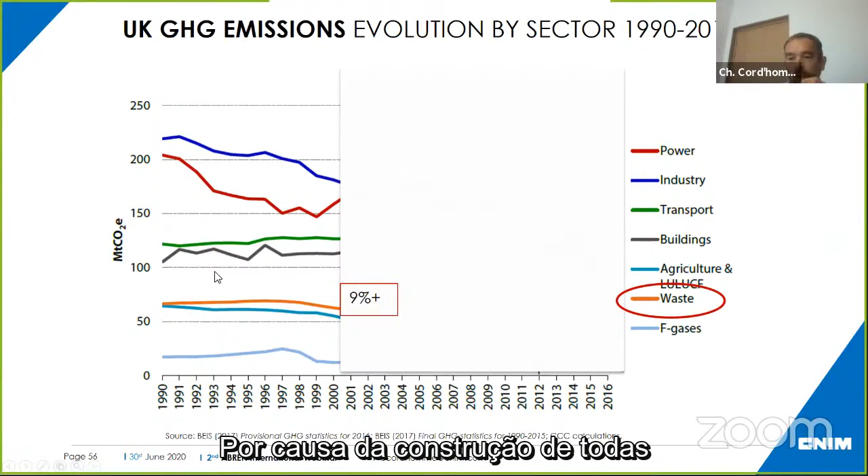Let's take the example of UK. In the 90s, the waste sector, shown in orange, among greenhouse gas emissions by sector—power, industry, transport, building, and waste—was more than 9% of emissions. That's not nothing; usually we talk only about industry, transport, or power, but not waste. Because of the construction of all these plants, it has been divided by 4, as you can see on the curve.

This is because landfill emits a lot of methane, which has a warming potential 25 times greater than CO2. Therefore landfilling waste has a huge impact on greenhouse gas emissions. It was 9% in UK; now it's less than 3%. It has decreased, divided by 4. It's a huge success.

They claim the annual reduction of greenhouse gas emissions for the waste sector in UK was minus 9% per year during this period, which compares very similarly to the increase in landfill tax of plus 10%. It was a very efficient policy over 15 years to obtain this result.

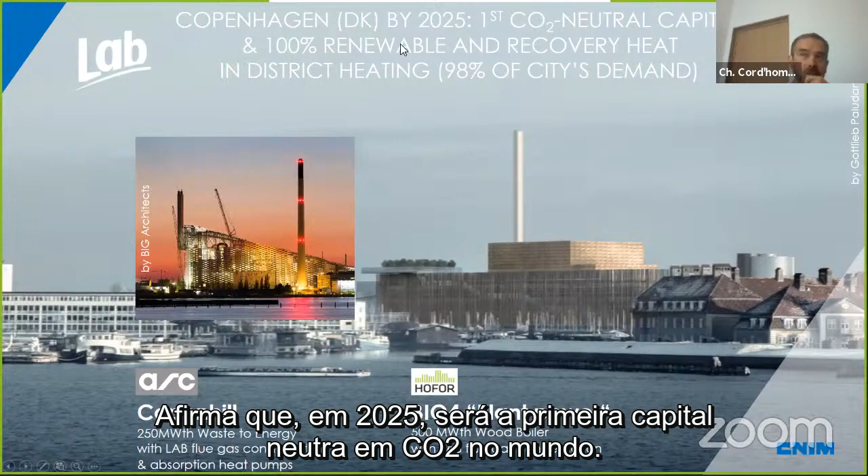This is not the only example of greenhouse gas reduction. For example, Copenhagen in Denmark claims that by 2025 it will be the first CO2 neutral capital in the world, with 100% renewable and recovered heat in district heating, representing 98% of the city's demand. Every citizen in Copenhagen is connected to district heating.

In Denmark, they decided to completely stop fossil fuel boilers for city heating, replacing coal-fired power plants with a brand new biomass plant, a 500 megawatt thermal wood boiler, where we supplied flue gas condensation for very high energy recovery. It's similar to a small natural gas condensing boiler, but on a huge scale.

And the other plant for waste, Amager, that I've shown you with the ski slope there - it's very interesting also because we have flue gas condensation, so we recover all the heat coming from the vapor in the flue gases to have very high energy efficiency.

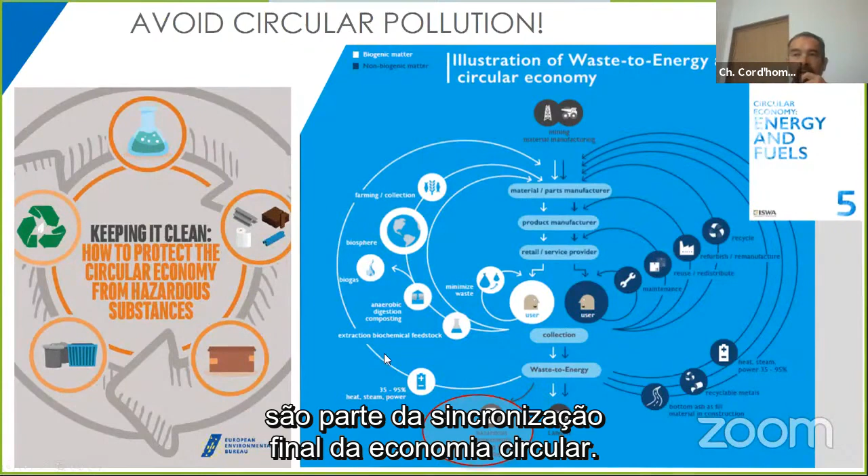To finish, waste-to-energy is a part of circular economy. You could see on this graph coming from this report from ISWA, Circular Economy, Energy and Fuels, it's a part of the final sink of the circular economy. We have pollution in our waste, and the only way to avoid this pollution and take out all hazardous components and isolate them from the biosphere is to have waste-to-energy, which concentrates all this pollution. It's very important to keep the circular economy clean. We need to protect it from hazardous substances, and we need financing - waste-to-energy is the solution to do that, to have circular economy and avoid circular pollution.

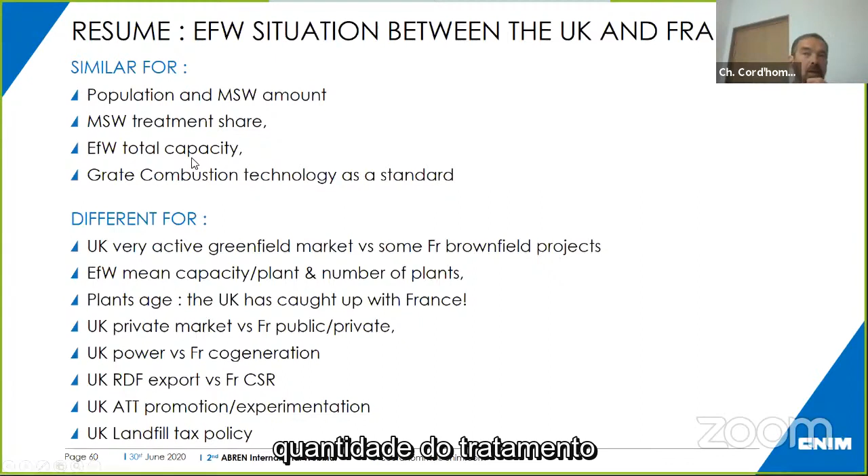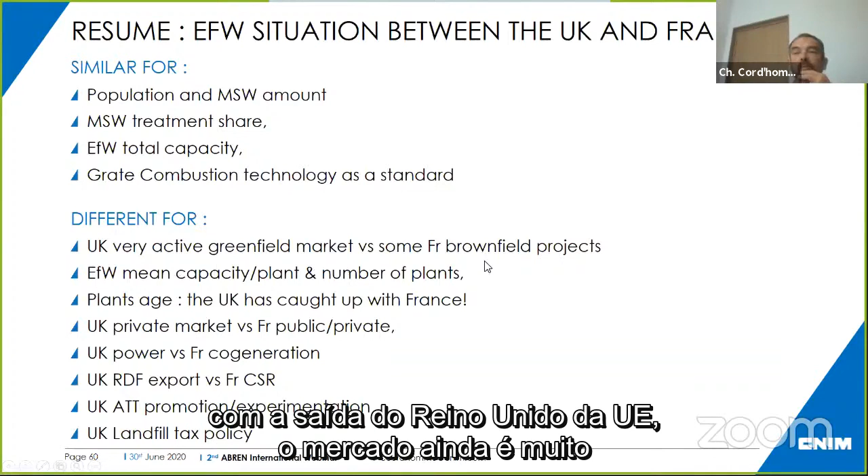So to conclude, in resume, you could see that the energy from waste situation between UK and France are similar for a number of figures like population, the amount, the treatment share, total capacity, and grate combustion technology as a standard. But it's very different because, in fact, UK has caught up with France for energy from waste. So the plant age, capacity of a plant, and number of plants are different. It has been, and it's still, a very active greenfield market.

It's different because it's a private market, so you need to be competitive compared to landfill, and this is the landfill tax effect there. In France, we have public tenders or private tenders as public service delegation. The point is there are very few cogeneration plants in UK, much less than in France, and nevertheless much less than in Denmark. There is some RDF export. We have another type of RDF, which is CSR, but it's not very developed in France. And finally, there has been some promotion of alternative thermal treatment, but a lot of failures, and this experimentation is now finishing.

So finally, energy from waste is a very compact, clean and secure waste solution that you could install in urban areas close to city centers, delivering renewable energy and very good at avoiding greenhouse gas emissions from landfill.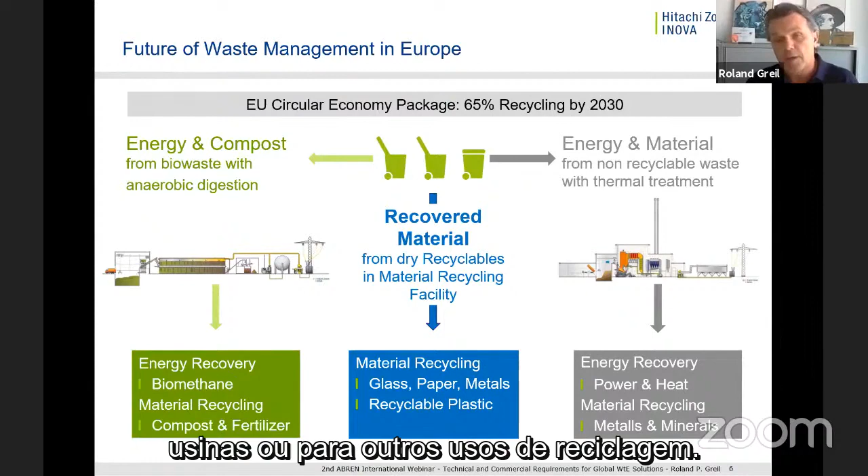Best is to separate at the source, and to bring it as a clean organic fraction to the AD plants or for other recycling uses. So then we have the two solutions. We have the thermal solution shown here, municipal solid waste, or RDF, or CDR as it's called in Brazil, used to generate electricity or heat in the best case, if you have that possibility, or process steam, and recover materials from the input material. Organic fraction goes to our Kompogas technology.

So over there we have food waste and green waste, which is digested in anaerobic digestion. And afterwards, the biogas is used to generate electricity, but in the best case, to clean it, to upgrade it from biogas to biomethane. For that, we provide the technology in-house as well, and use this biomethane as a fuel to drive cars, trucks. So these are the two main solutions that we have in our portfolio.

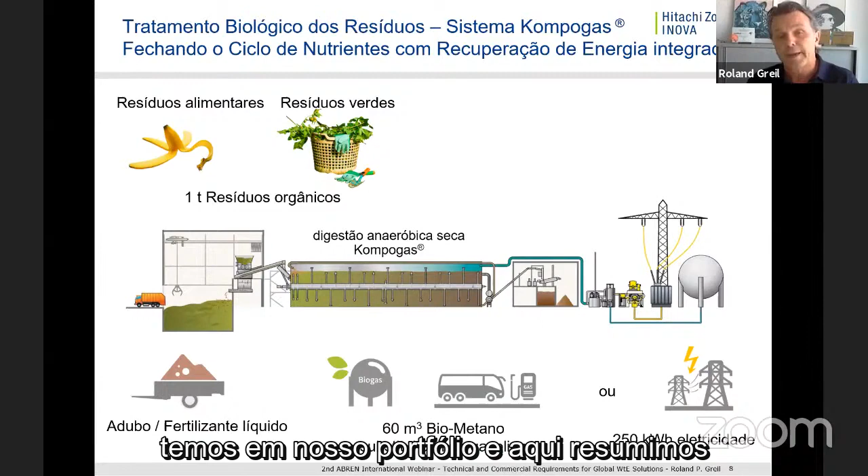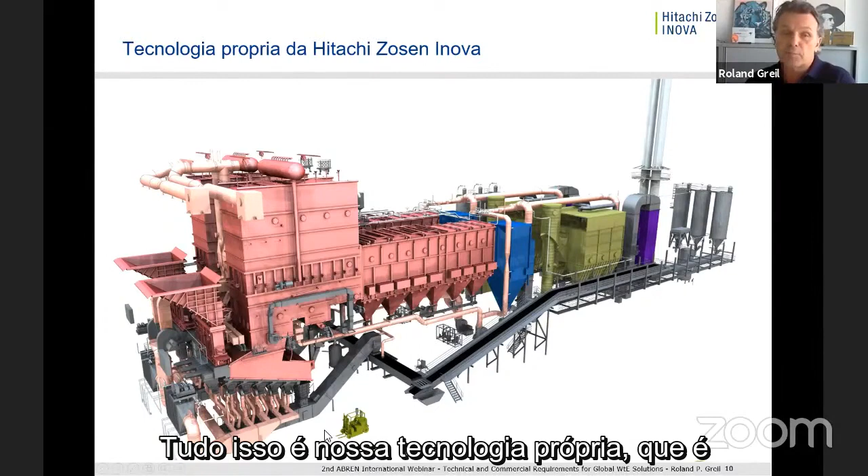This is our core technology, our proprietary technology. You see here the whole combustion section. The waste is fed into this chute. The boiler, heat recovery here, and then flue gas treatment systems, residue handling and residue treatment. So all this is our proprietary technology, which is implemented into complete plants, into turnkey deliveries.

So we have our proprietary technology, and of course we need other technologies which are not our own, but where we do quite some engineering for energy use. That means the water steam cycle, balance of plant, all these auxiliary systems, and electrical and control systems. And on top, of course, you have the building civil works part, where we do not do any engineering; there we just manage those civil work packages and integrate everything in a complete integrated solution for turnkey plants.

So we are a technology provider, but due to the development over the last 15 years, became more and more also an EPC contractor. This was mainly driven, as Christoph explained before, I think, by the UK market, where there was a high demand for EPC turnkey deliveries.

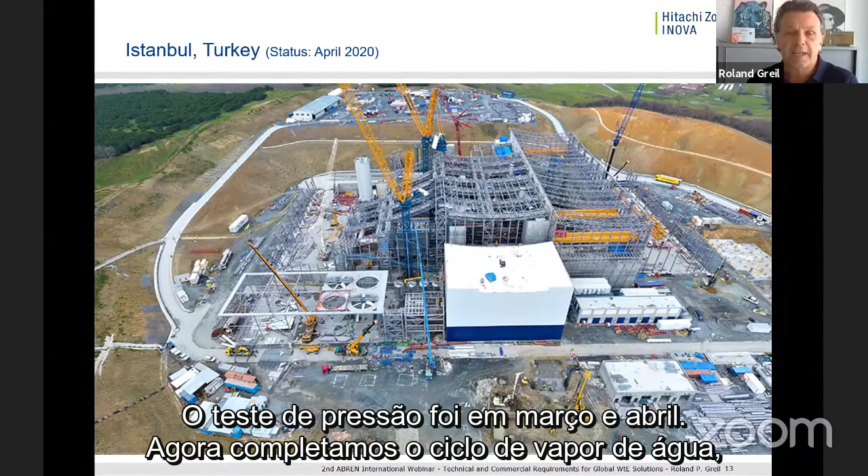Istanbul, that is the situation in April. So Istanbul is an EPC job. We deliver the plant as an EPC and technology supplier to the municipality. This project started in September 2017. So we see the main equipment is installed, boilers are installed. Boiler pressure test was in March and April, and now we are completing the water steam cycle, air-cooled condenser here, and the whole building. It's quite a special architectural design this plant will have.

Some more details here. So this will be the largest turnkey project ever awarded in Europe. It's 1 million tons a year. So a big plant. It will then become the largest energy from waste plant in Europe. We do the EPC together with a local partner, the Turkish company Makyol. So this is basically what we do in all the new markets. We team up with partners that have local experience. Makyol is covering mainly the civil works, and together we do erection of all equipment.

Important to mention in this project is this was a project initially covered by a supplier credit insurance by the Swiss Export Credit Agency, which is called SERV. You may know there were some turbulences in Turkey in 2017-18, which made it necessary to find another way to finance this project. So SERV supported this new financing solution, long-term financing by a buyer credit insurance, which was then implemented, I think, about a year ago.

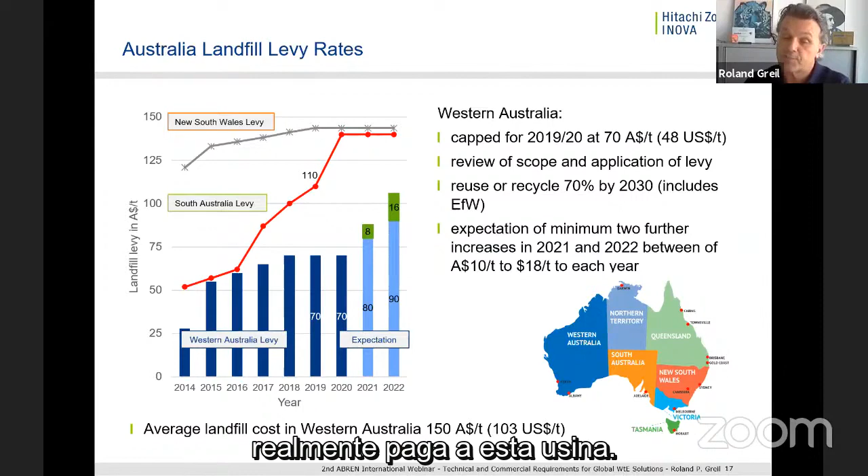At the end, we had to close, I think, more than 20 contracts to come to the financial close. And you're doing that all at the same time. So you can imagine people involved in such developments, in such financial closings, are very busy. So it's very tough. You're basically on 24 hours for weeks, and it's very tough to close all these contracts at the same time.

So here we actually are on 3 levels. Hitachi is on the SPV level, so we own part of that plant with a minor share. We are in the EPC team, and together with Acciona and Suez, we will also operate that plant. So we are involved at all levels in this project, which is more difficult than just being a technology or EPC supplier.

This project is not yet in execution. Here we are actually in the phase where we are aiming for the financial close. Very challenging. Many people involved in that project. The expectation for sure is that we will close it this year. In the best case, already in September, I would say.

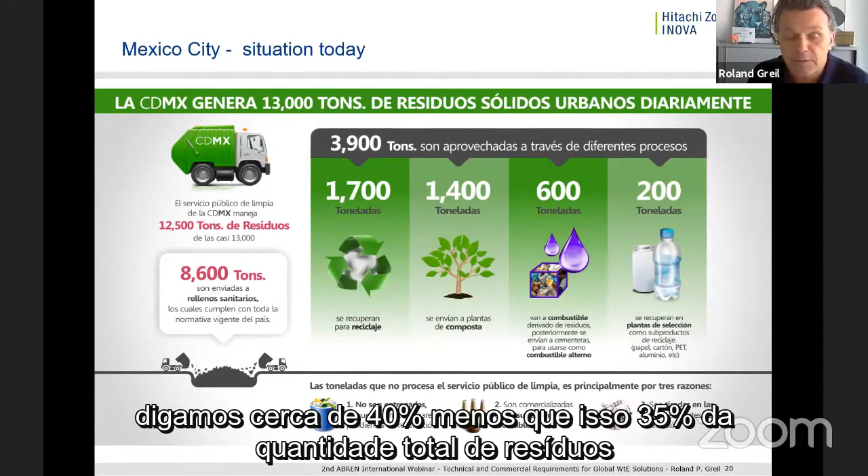So actually out from this 8,600, another 3,600 is planned to be separated as organic fraction or as recyclable materials. And then the remaining, let's say less than 40%, 35% of the total waste amount would then go to this plant. So this plant would then treat all the non-recyclable, post-recycled waste in Mexico City. It was intended to be probably the first plant in Latin America.

Unfortunately, this project is on hold. The development started already in 2015, the competition for the concession in 2016, and the concession agreement, the so-called CPS, the service contract, was closed in 2017. And then we worked towards the financial close. We were not really ready, but almost finalized by the end of 2018.

But you may know that there were elections. So a lot of projects have been put on hold. And well, we will see when we will continue. Hopefully we can continue eventually. There might be some changes, but actually this contract is still in force. This concession agreement with the city is still in place.

It's also a big facility. This is very important for this kind of project, to make it viable. You have to think big. It would be even more challenging in all these places that I have presented to realize small plants. So this is also quite a big plant. Also high electrical efficiency. And as I said, they have these contracts.

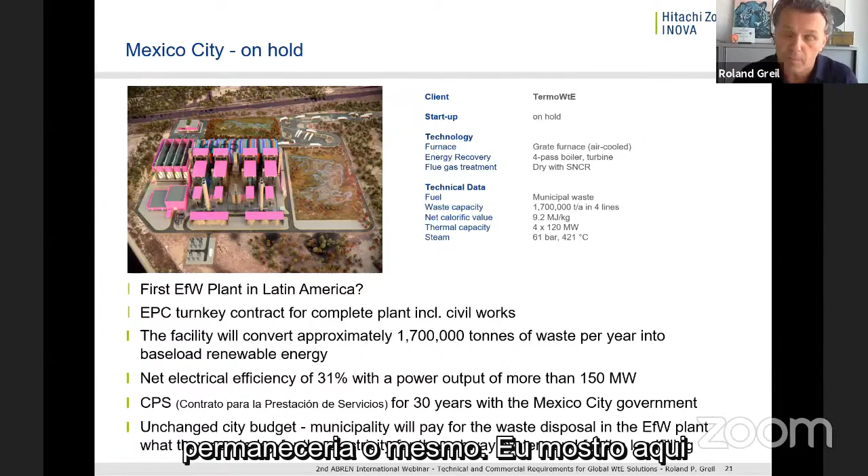I show you here some numbers. I mentioned this service contract called CPS. It's for 30 years, for this amount of waste and this amount of energy delivered. All is included in this service contract. The plant itself can have a higher throughput, can produce more gigawatt hours, which will be sold to the market.

So the fee the city had to pay is $130 million per year for that service. And this payment, and this is also very important, was also guaranteed by a governmental fund. So this makes it actually pretty simple and safe to finance such a project.

You can also calculate what the cost per ton of waste is, assuming a certain cost for the landfill. The current landfill cost in Mexico is probably around $20. So if you calculate that with that throughput, you would have an electricity price of around $100 if it would be paid by the electricity itself. But it's an amount paid in monthly rates, guaranteed for 30 years.

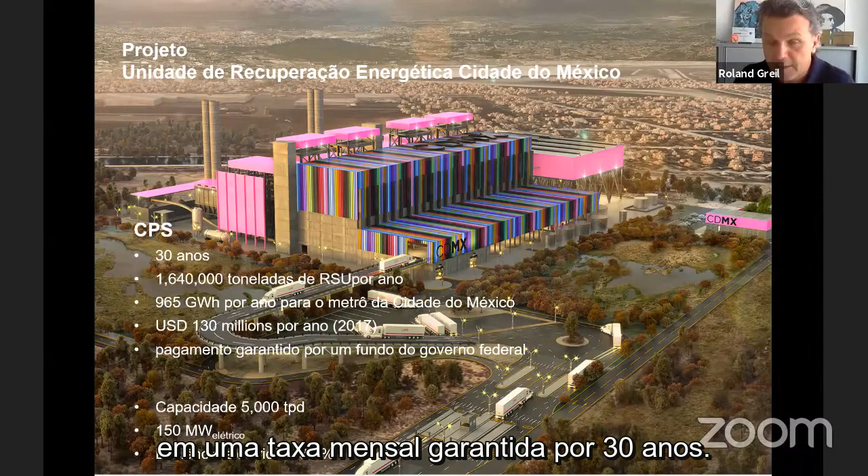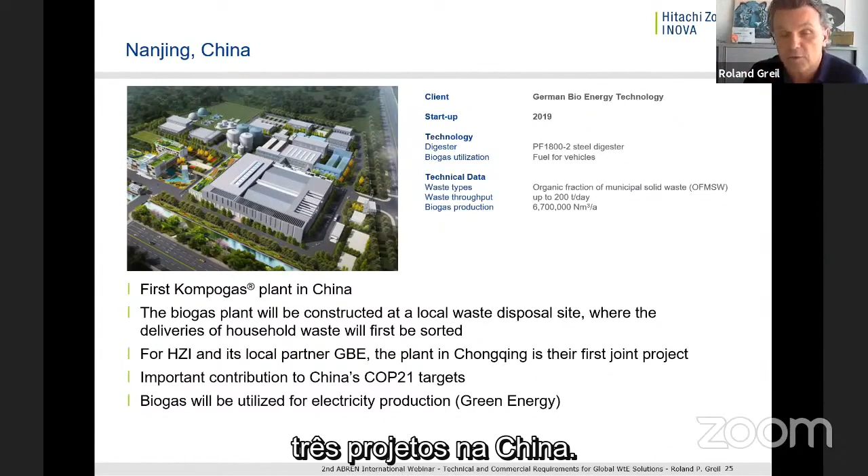In China, we're working together with German Bioenergy, delivering the technology for an anaerobic digestion plant in China. As I showed in the previous slide, this was the first project, and in total we currently have 3 projects in China already delivered or being delivered.

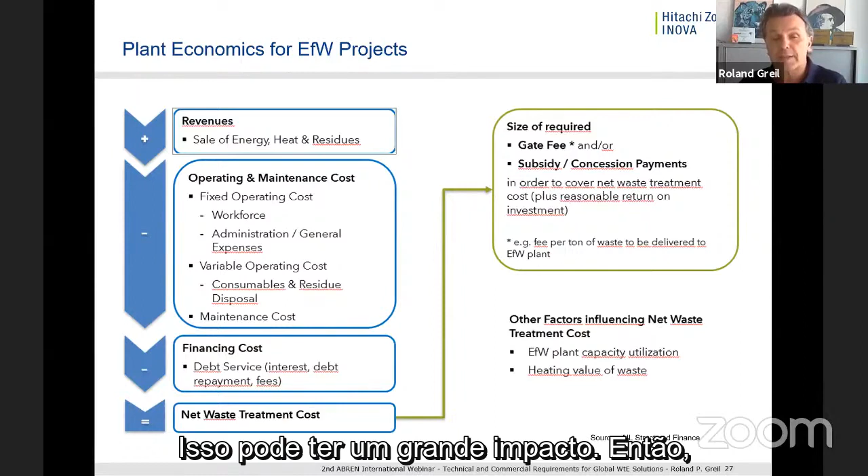So actually, at the end, what you need here, the net waste treatment cost, is what has to be covered by the gate fee or by subsidies or concession payments. So of course, this can make a big difference in what is finally needed as a gate fee or subsidy to make a project viable.

In other places, unfortunately not in the UK, but in Switzerland, in Scandinavia, all plants are producing power and heat for district heating purposes. You could also even produce district cold. There's a plant in Barcelona, Spain, which is doing that for the nearby office buildings, producing the cooling of those buildings in a centralized cooling system.

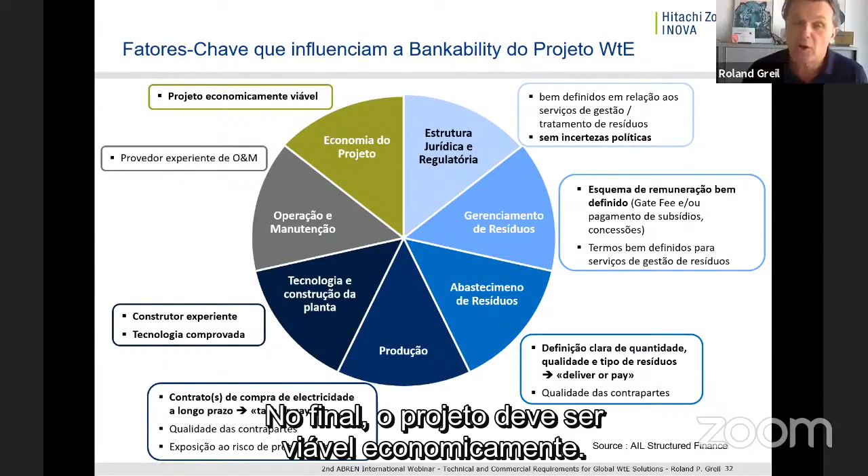Then of course you need the proven technology, which we have - Christoph mentioned what proven technology is. And you need an experienced contractor, because banks or lenders will not like to do that with someone who has no real experience and not a good track record in building a plant. The same goes for the operator of the plant, the O&M contractor, also very relevant. And of course, at the end, you must have an economically viable project. So here you can see it again.

This high risk, low risk technology needs to be mature, proven technology, very relevant, along with plant construction by an experienced contractor that has a good track record and technology. At the end, the lender's advisor, technical and legal advisors will look into all these details and finally decide whether you get the financing of such a project or not. So if you have the wrong partners, if you do not have a strong team here, you will fail at the end and you will not get the financing.

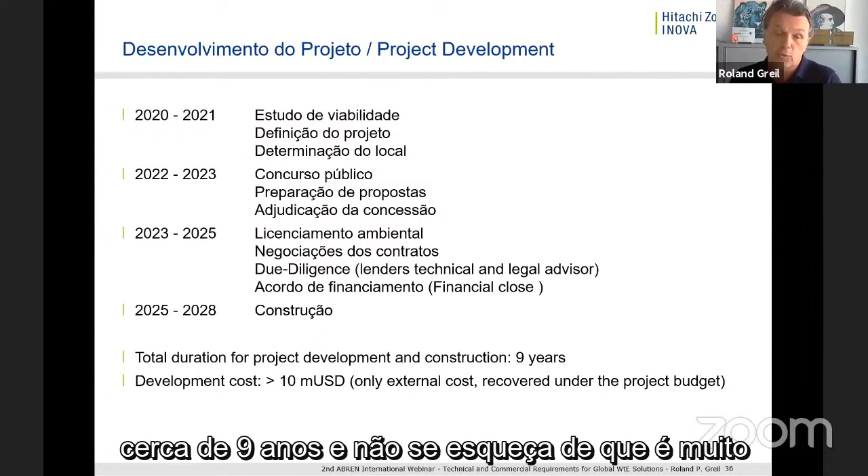In this case, I would expect the total duration from first activities until the plant is in commercial operation of around 9 years. And don't forget, which is very important, the development cost. To develop through all these stages, only the external costs, you should consider at least $10 million to be spent over this period. If you do not come to the financial close, you will lose that money.

But this is only external costs. On top of that, you have the internal costs - the cost from us as an EPC contractor or an O&M contractor, from the sponsors. All these involved parties have internal costs, which is not considered here. This is really only to pay the external parties, including this lender's technical and legal advisor, which can be very expensive. And all this is at the end recovered under the project budget - this will be part of the financing.